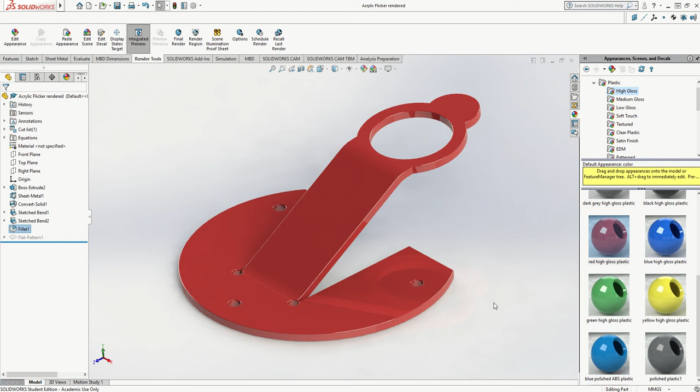The shape's already drawn as a flat shape, and in fact this was drawn in 2D Design and then imported as a DXF file, exported from 2D Design and then opened in SolidWorks as a 2D sketch. It's already been extruded - you can see there's a boss extrude to take it to 3mm of thickness, so it looks like a solid object already. But to be able to bend this, I now need to convert it to sheet metal.

So I'm going to go to my sheet metal tab. Now mine's already open. If you don't have that visible, you right click on that menu and tick what it is you want available. You can see render tools can be switched off - I'm going to look for my sheet metal and switch that off. You can notice now it's gone from the menu. So I'm just going to right click again and turn back on the sheet metal, and you'll see the tab has reappeared.

So go to sheet metal, and I need to convert this object to sheet metal. I'm going to go to the top menu and convert to sheet metal. The first thing you'll recognise is this blue select box - it needs to know the top surface that we're turning into sheet metal. So I'm going to click anywhere on the object, and it says face 1. It then wants to know the thickness of the sheet metal. Even though it's already a 3mm thick extruded shape, it wants to know the thickness of the sheet material we're making it from. I've typed in 3 on a previous drawing and it's defaulted to that setting, and that's all I need to do at this point. So I can click OK, and that's now converted to sheet metal.

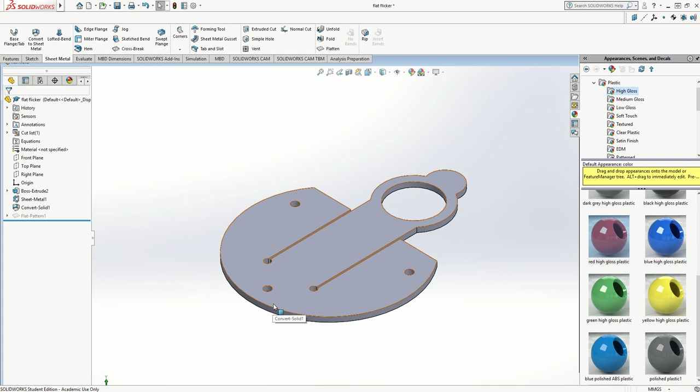So what I'm going to do now is create a bend in between these two holes here. Those two holes are basically there to stop the plastic continuing tearing when we make a fold across there. If we just laser cut and stopped at an end line, then bending there could actually cause the plastic to keep on tearing. So by creating a curve, it prevents that happening. It's quite a good technique for the school workshop.

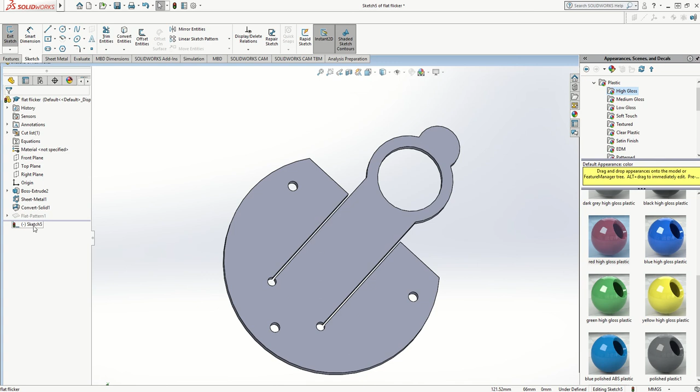So what I'm going to do is a sketched bend, which is this feature here. I'm going to go to sketched bend, and it says on the menu on the left, select a plane or face on which to sketch the bend lines. So I need to choose this top face because I'm going to sketch on there a line between the centres of these circles where I want my bend to be. You'll see that sketch 5 has appeared. So I'm going to click on there and go normal to.

That turns it to face me, and I'm using the mouse roller wheel just to zoom in a little bit better. Then I'm going to use a simple sketch line, and snap it to the centre of that circle and across to there. I'm going to click the green tick and accept that as an OK sketch. Now I'm going to go Control 7 on the keyboard to take it back to isometric, and you can see here it's still on the insert line, so I can tick on that, and I now want to go back to my sheet metal tab and my sketch bend.

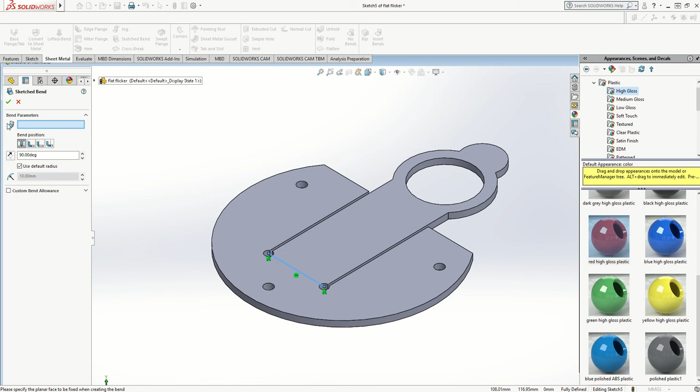So it's saying bend parameters - it wants a flat face, a fixed face. I'm going to keep this bottom face fixed, and you'll see straight away it's tried to roll or bend it upwards. You can see there are 4 different options for the bend position, and this bend position is relative to where you've drawn the line. If you just click on the different options, it will change the way in which it bends the material. The one I'm actually interested in is this one here.

Now I don't want a 90-degree bend, I actually want a 30-degree bend, so I'm going to click on 30. If I'd wanted it to bend downwards, I can reverse the direction, but I actually want it coming upwards. And it's got a 10mm radius for that curvature.

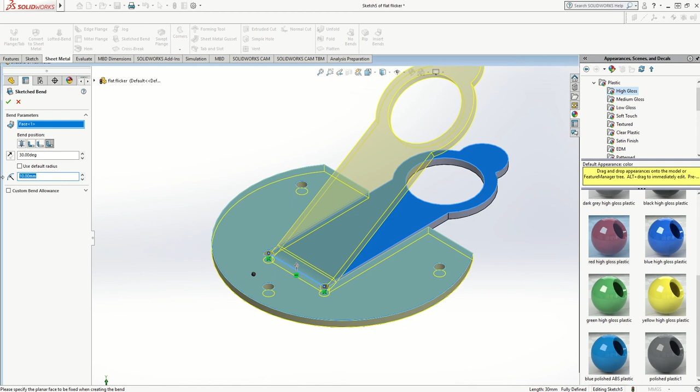You can change that and make it a tighter radius if you want, but in reality it's going to be more realistic probably as a 10mm radius, so I'll just leave it as a default radius there. I'm happy with that, so I'm going to click on the green tick, and my first bend is done.

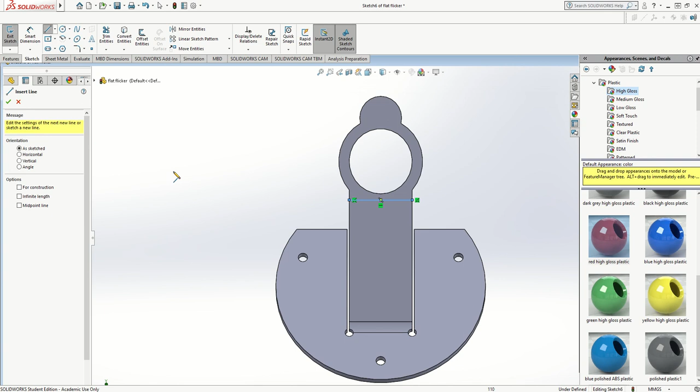I now need to put a second bend along here, so again I need to go to sketched bend. It wants me to select the face where I want to sketch. The sketch 6 has appeared, so I need to click on sketch 6 and go normal to, and I can then put a line where I want my next bend to be. I'm going to drop it just below the circle there, click on the green tick, and press Ctrl 7 on the keyboard to take me back to isometric. It's ready now to have the sketch bend done.

Accept the line as finished, go back to your sheet metal tab and choose sketch bend, and now it wants to know the fixed face again. This time the fixed face is going to be this one. The bend angle is going to be 25, and I'm going to leave the default radius and see what happens.

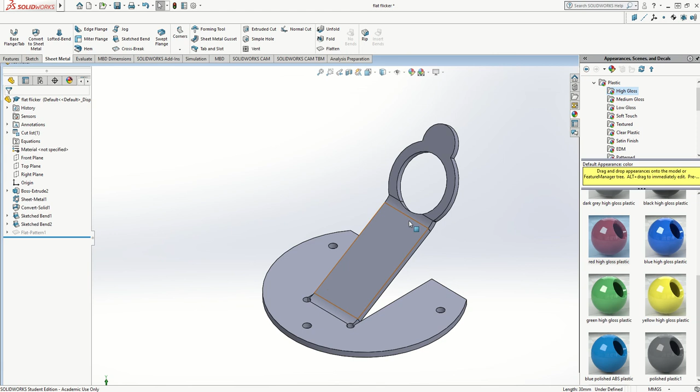Now it's gone the wrong way, it's come upwards, so I'm going to go back to my sketch bend 2 and edit that feature, go the opposite way, and click on accept. In fact I could play around with the position of the lines here and see which one looks best.

Actually that one there, you can see, is folding the curve into the hole, and this small hole in the middle is for a table tennis ball to sit in. It's a little flicker for a desk toy, a little basketball game.

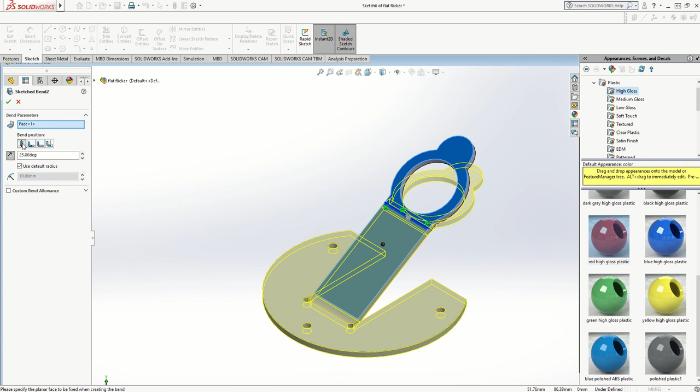That curve is going to deform the edge of the circle there, so I'm going to choose one of the options that keeps the end of the bend outside of that circle. I'll probably choose that one there. I'm going to click on tick, and I've accepted that.

If I look at that from a side view, you should see that the curve stops. Hit the space bar, look at it from a side view. So there's the curve, and then it's back to a flat face by the time it gets there. I'm going to press Ctrl 7 to take it to isometric, and you can see now that's got 2 finished bends, a 30 degree and a 25 degree.

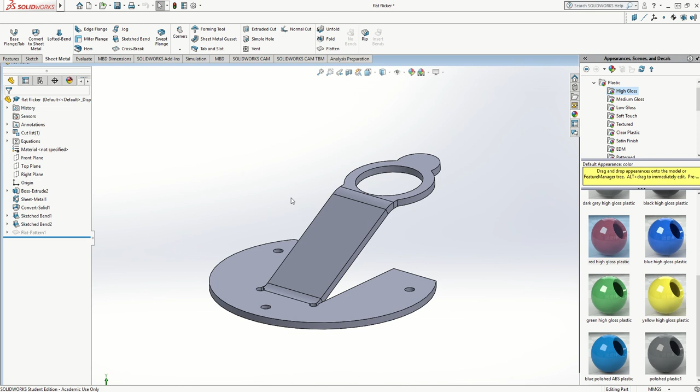You can also take this back to a flat shape if you needed to. If you've drawn a 3D shape, you could actually take it down to a flat shape. I'm not going to do that just now, but what I am going to do is finish it off with a nice render, and because it's plastic I always tend to put a very small radius on all the edges so that it gives a high shine appearance and a soft edge appearance. I'm going to do it without the soft edge first so you can see the difference.

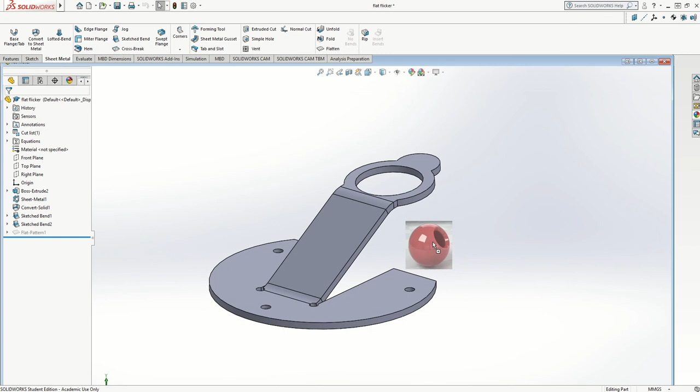I've got my menu open, so I'll just close that off. I'm going to go to my appearances. I'm going to choose red plastic, I'll just show you in the menus here. I'm in appearances, open up the plastics, I'm going to choose high gloss, drag the red in and drop it on there, and I want that on the whole of the flicker, so I'm happy with that.

Now I want to go to my render tools, and if you remember at the beginning I closed the render tools down, so I'm going to right click and add the render tools back in. There we go. So I'm going to click on render tools.

So I've selected the integrated preview, and you can see there, because I haven't actually radiused any of the edges, those blue lines, all of the edges look quite sharp, so it doesn't look great. It looks like a really sharp edge piece of plastic.

So what I'm going to do is turn the integrated preview off. I'm going to select all of the shape, and go to features. I'm going to put a very small fillet onto all of those edges, and that fillet is just going to be very small, 0.2 of a millimetre, entering it into the box down there. Then I'm going to click on the green tick.

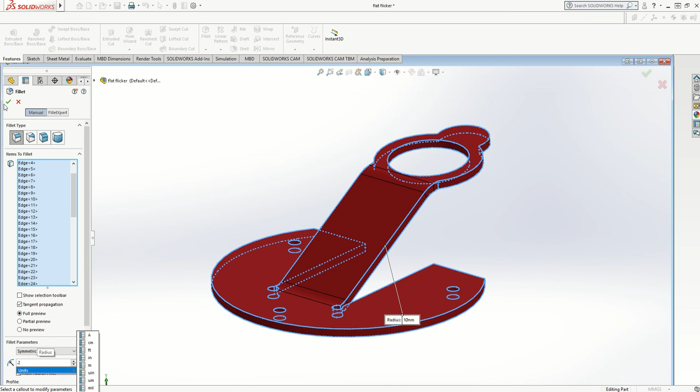Then I'm going to go back to my render tools and do an integrated preview. And you'll notice there's quite a difference, that the edges now just look that little bit softer. They're picking up on the reflection slightly, so it starts to look a little bit more like a moulded piece of plastic rather than a laser cut sharp edge piece of plastic.

And that's the end of the video.